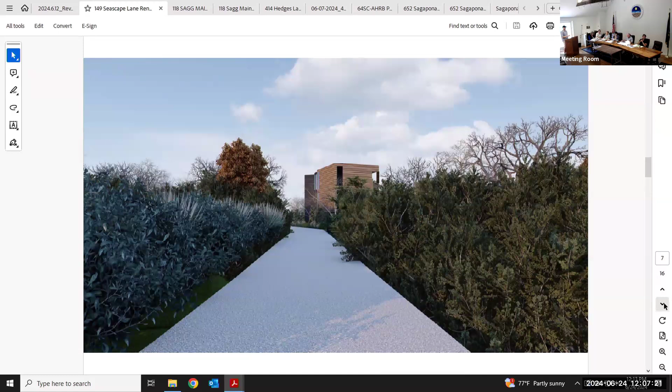So, some of the other comments were that our first renditions of the design did not have a lot of elements that matched the front to the back. We had a cantilever in the front, and then the back had a balcony across the whole back. So we took those comments and brought it to show similar elements throughout, which I feel we grabbed in this design.

I don't know if you want to go to the daytime. So the front has the black material screening in front of the windows with the natural wood tone. We're going to follow that to the back elevation with similar screening material, so those elements are kind of matching front to back.

That design - in reviewing some of the other modern houses, I know some of the board members mentioned to take a look at some of the modern elements in those houses. So I took a look at those. I do have images of that with me if you need to see some of those elements.

So last hearing we also had a question, or every single meeting we brought up building height - how tall is this house? And the house is 31 and a half feet tall, which I confirmed with the building department here, with John, that it's the same height as the other houses next to it, behind it at 131, 139, and 138 Seascape. They're all the same height. That's the maximum height that we're allowed in this zoning district.

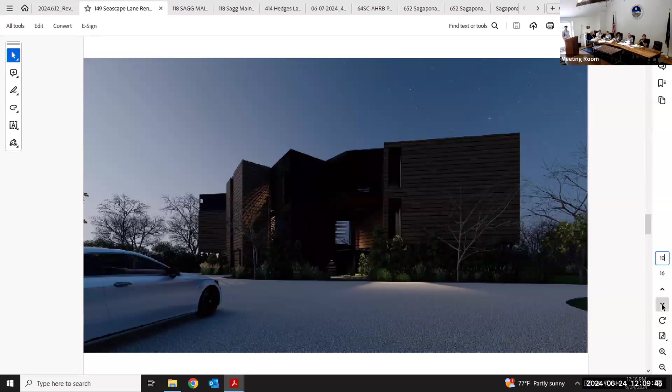That's it. So, last page that we have.

And it's all glass across. I want to point out that our side elevation that's pointing that way only has 24-inch high glass pointing that way. Not a lot of light going across Sagg Main.

We also discussed window treatments that you were favorable for. So we're going to do on the second floor the Huper Optik Ceramic 30 film, which only emits 30% of the light from the house outside. And the first floor is going to be the 40% light emission coming out. So we're going to be looking at that adjustment that we came to agreement with.

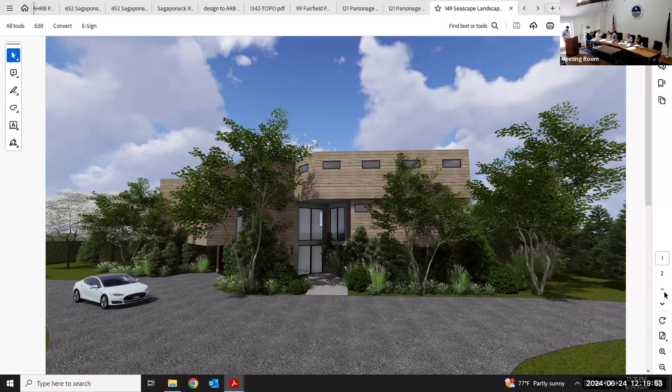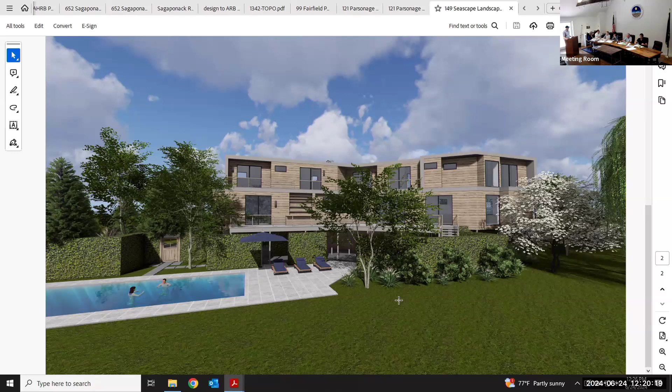We've also discussed possibly doing a berm in the front of the house. From my understanding of code, my thinking is that we can't grade up, but I don't know if we could discuss that.

I think with the front landscaping, hiding some of the elevation with the landscaping you have takes care of the visual aspect without having to put a berm there. Does that eliminate a lot of that mass and scale issue? Yeah, from the front, I think it really does.

Okay, it's just really, it's from here, and I know there's a measurable precedent. I just wonder if this exposure we see from here would necessarily suit a prospective buyer to have that exposure as well. And if it's landscaping, I'm not sure how you ensure someone doesn't mow it down the second they buy it, you know?

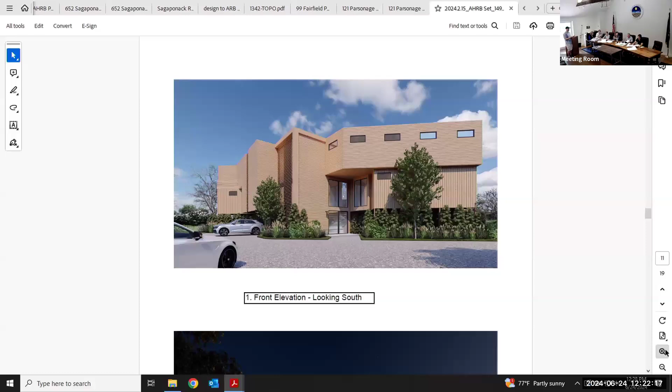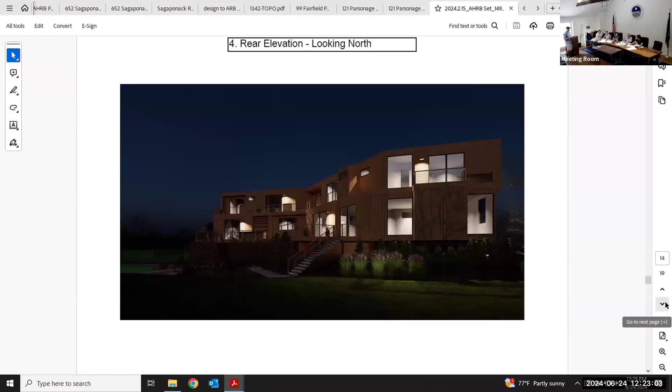I think the improvements are measurable. I don't think this is a case of them putting us up against the ropes time after time. I think the first changes were definitely subtle. I'll put the first few meetings definitely on you guys. I think it was more just like the materials we changed at first.

Yeah, we completely came back two months later. We made a lot of changes, tried to bring some elements from the front to the back, obviously still trying to maintain those views that my client really wants.

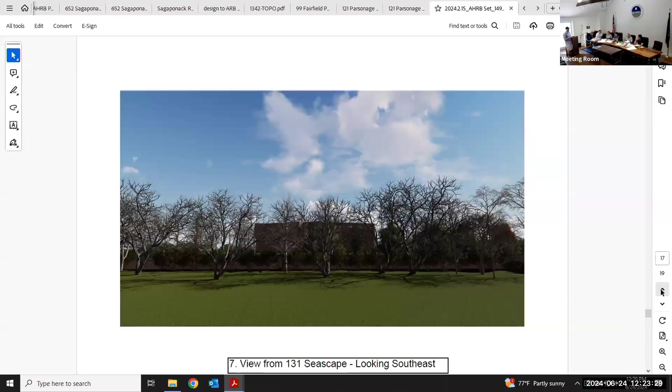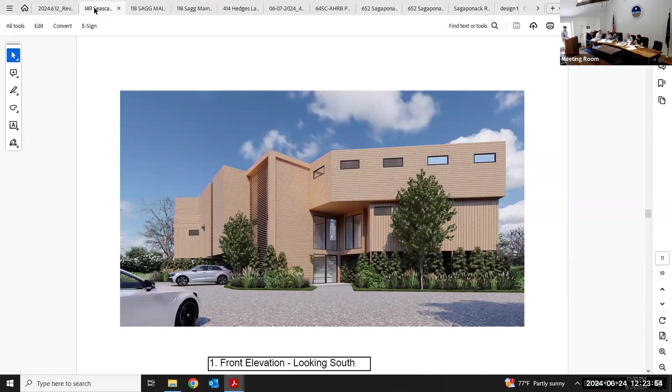The dual tonal color helps. I sort of think it does. I think it will from a distance. I think it could, I think it has in these renderings. And I think even if it does look like two houses, or somewhat, at least it implies a little break in the sprawl.

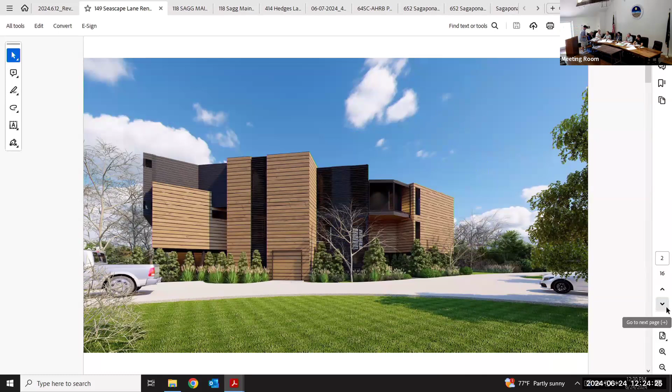Could you just explain the difference between the last time and this time? It looks more industrial. So, this was all open, now this is all enclosed. We created a lot of these elements out of certain portions of the house that we previously had. We had this kind of protrusion coming out... I don't remember which one we're talking about, the elements that came in and out.

Oh, yeah, so we took that comment and brought it so that it made sense, that everything has an idea behind it, a reason why it's there. Instead of just, this was essentially just a bathroom that had a window in it, a different size window that didn't really match anything, so we brought that to this.

I like the changes with this.

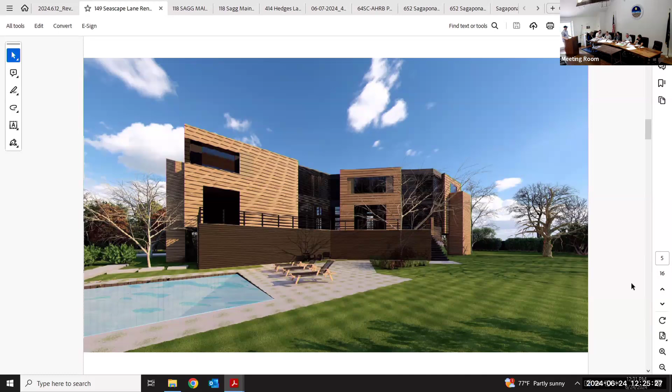I was just curious, being near the water, if there was any thought or if you'd contemplated any other materials to juxtapose with the wood, like stone or concrete or something, just from a durability and design standpoint. We did have some stucco in some of our first designs, but we felt that maybe that was not favorable, so we went more with the natural blues.

It's just a design decision. How are these going to weather, do you know? I'm just curious. I mean, is this going to end up being gray anyway? It'll tend to gray out, but I'm sure it's going to be like the images of the other houses.

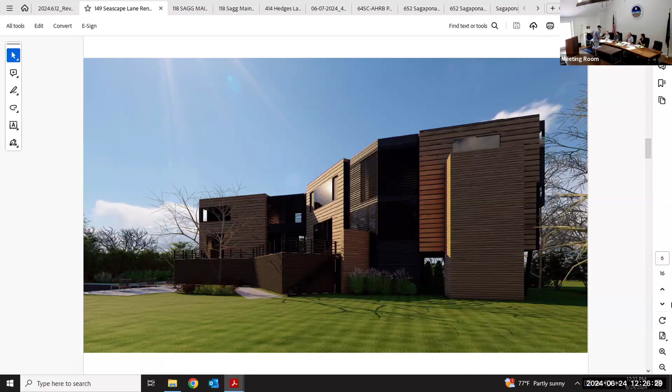So it's going to gray out. This is going to turn into a lighter gray, you said? No, that one will turn gray, oh okay, and this will just be... yeah, that should just be the same, slightly darker.

Is this stamped or painted? So that's slightly inked, how they apply to that material. It's a stain. That's a stain. It is a stain, okay, thank you.

The color of that stain, please. It's called Tiger Smooth. And that's the term used for how much it's burned. It's referring to a burn. It's burned Tiger Smooth.

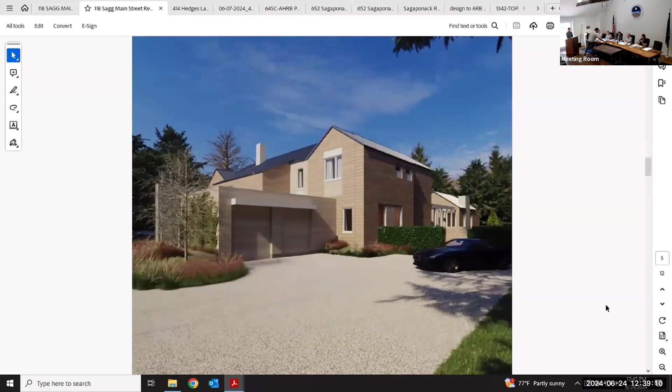I can show you some images I took today of the front from Sagg Main Street. There are three mature maple trees that are not on our property, they're part of the street space, so we are going to leave those. Inside our property, we also have a mature tree - I'm not a landscape architect so I don't know what it is, but it has a diameter of roughly 50 feet, so it's very wide.

That tree will be on the right side of the front. Going back to the back side, the roof line on this side was well received by the board, so we did not change it. But we reduced by a considerable amount the glass versus solid ratio on the back. On this side before we were at 57.44%, and right now we've reduced it to 32.65%. We eliminated all the transoms, reduced the height of the glass on both floors, reduced the width in the wings to the sides, and reduced the center part a little bit.

Also on the pool house, we reduced the size of the glass considerably. That's a view from the rear of the house, and if we move on we can see the side views of the renderings.

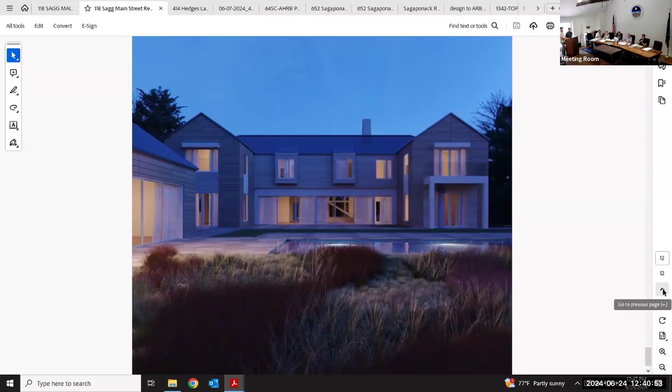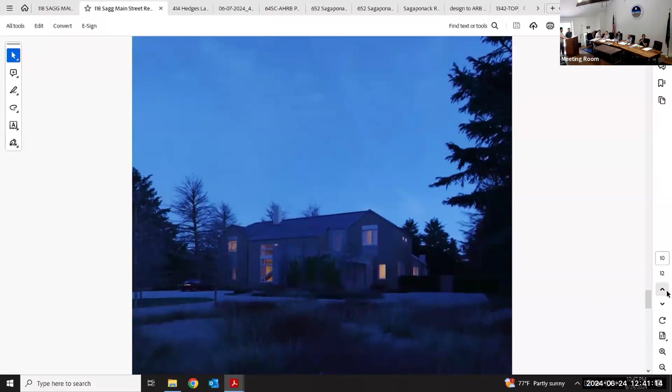That will be the right side, basically from the side where you access the garage - on that side we are at 5% glass. On the opposite side, the south facing left side of the house, we are at 9.73%.

These numbers for the last two sides incorporate the pool house - we're basically taking the pool house as part of the main house for our regulations. The height of the house and the roof lines and pitch of the gables are all under what's required. I believe they are 31 feet above existing ground level, and the flat roof over the garage is also under.

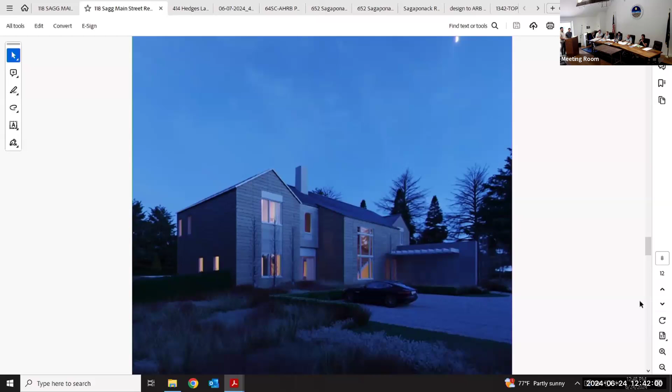Let me see what else has changed from before. Just to give some numbers, the proposed width of the house is 85 feet wide. The existing house we're proposing to demolish is 78 feet, so we've increased the width by 7 feet.

The house sits so the front of the garage from the property line is at 85 feet, and the main chunk of the house is at 110 feet from the property line. Adding the 25 feet of public right of way to the curb line, the main house will be sitting at 135 feet from the curb line of Sagg Main Street.

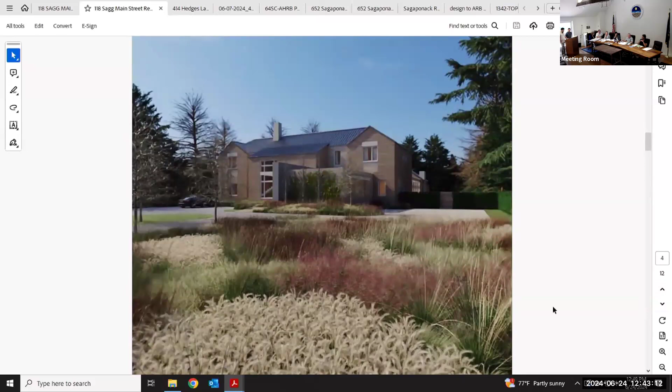I also did some comparisons to the properties across - the three properties right across from us: one is at 120 feet from the curb, another at 156, and another at 60 feet. On the north side of the property we have the farm, and on the south side we have a house you don't see from the street because of the landscaping, but it sits at 80 feet from the curb.

So I think that's a summary. That's been there a long time. Yeah.

Would you say that the zinc roof versus a cedar shake is an important design element? I have my client here, so...

We like the stainless steel roof. We don't think it's consistent with a more traditional style roof, so we'd like to keep this the stainless steel. We're open to... it's also just worth noting that the house right across on the right has a standing seam metal roof. Yeah.

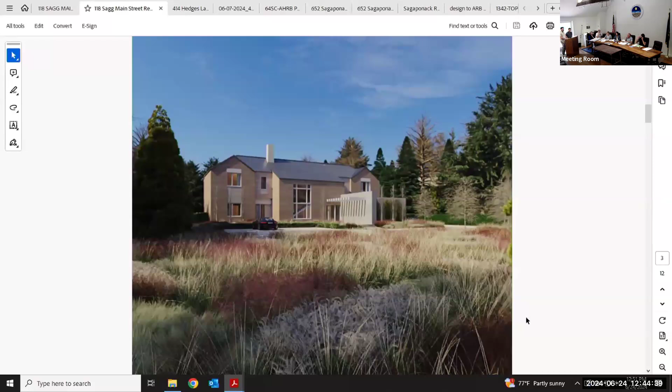Just a little detail, but on the front of the house, which you see on that rendering, the front wall of the garage, which has a flat roof and is what you'll see when you're driving into the property, we want to cover that whole wall with English ivy. So in reality it would look like a green wall.

And the only thing you'll see when you're walking into the house is also a vertical rectangular wall. The idea is that it would look almost like a freestanding wall. But from the street, you don't see it at that angle, it'll be screened by landscape. You'd only see it as you're approaching the house, and that wall will have a cantilevered pergola just to cast some shade as you're walking in.

And the flat roof on the garage, is that being used for anything like decking? No, we're not proposing any decking over there.

Also, the whole front, wherever there are no trees, so basically what would normally be a lawn, we'd like to make it feel almost like a meadow - very wild with tall grasses mixed with some wildflowers. So you wouldn't really see that much from the street, but as you're driving into the property you'd feel like you're driving through a more wild landscape.

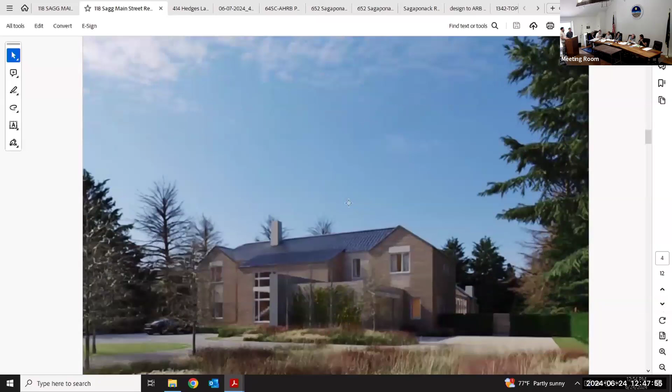The reason for the other two is those are like window seats, in the bedrooms - basically you have the window with a little cushion that you can sit on. The one that doesn't have it is a bathroom.

Same side - you have some shed roofs over those two back portions that come out on the side. What is that material for? The second floor, it's all standing seam.

Right, but the little shelter - the overhangs. It's just a little overhang so that if you leave the windows open, rain doesn't get in. It's an 18 inch overhang, so it'll just be a flat top with the wood in the front, painted.

Is it wood? What's the material - they will be clad in wood, yeah, but stained, those parts will be stained white. Oh, it's what you're saying, it's wood but it's painted white. Yeah, those portions will be white - the two overhangs and also the structure of the balcony on the right side.

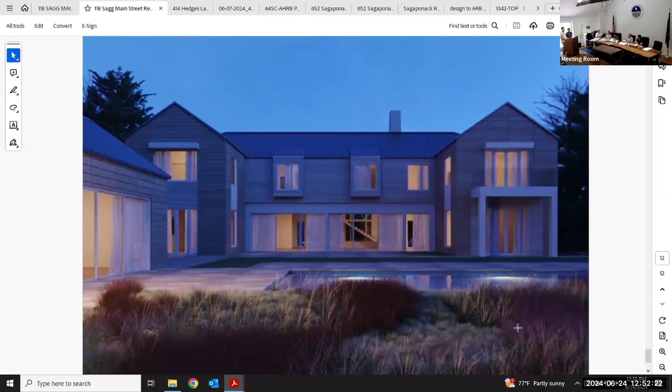Okay, sure, well that's not a question I thought would come. We're held to the public's understanding of what is important to the historical understanding and appreciation for the village. As one of the early settlers here, that's something dear to my heart. So I don't know, we have not, of course we have nothing but respect for it. Pardon me, because I don't know that particular zone.

Okay, all right. So if I can jump in, can everyone hear me all right? Yeah, if I can jump in.

I think we discussed this at the last, if not second-to-last meeting, regarding that proposed stone house. So nothing in our code- and actually, an outside question, is this property within the historic district, or is it the one slightly outside of it? It is one property away from the district, yes. So it is not in the historic district. It is right next door to the historic district, yes. But there is nothing in the code which obligates an applicant next door to the historic district, or to a historic structure, to comport with the historicity of those neighboring structures.

That being said, the code allows you to look at striking dissimilarity with neighboring structures, but the Secretary of the Interior guidelines are applicable within the district. So just a point of clarification: if you want to talk about striking dissimilarity with the neighboring historic structure, that's one thing we could do. Also, this is on Sagg Main Street, and I believe there is a view shed, like a scenic view shed, along Sagg Main Street. It's next door to that, yes. So obviously we need to respect the scenic view shed and the dissimilarity-versus-monotony dynamic in the code, but there's nothing in the code that railroads the applicant just for being next door to a historic property.

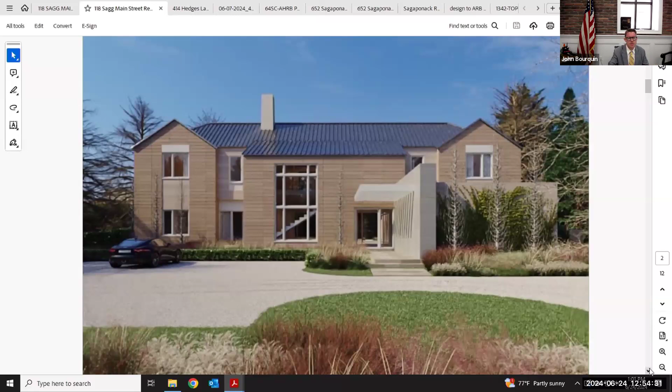If I may clarify, if I'm not mistaken, I believe we're two tax lots. Well, the Norton House - or sorry, the Wilford House - is your neighbor to the south. There's not another lot in there. Again, I might be wrong, apologies. I think that's just outside the historic district also. The Norton House is on the register - I mean, sorry, the Wilford House - that was contributing, as far as I know.

From what I'm looking at in the area, the house right next door - I don't know the name of it - it's a very large property with a swimming pool, so I can't see it from the street. It's completely blocked from the street by landscaping. It used to be visible from the street, but the most recent owner has put in a lot more landscaping. That was a very old house, and one of the founding families was there also.

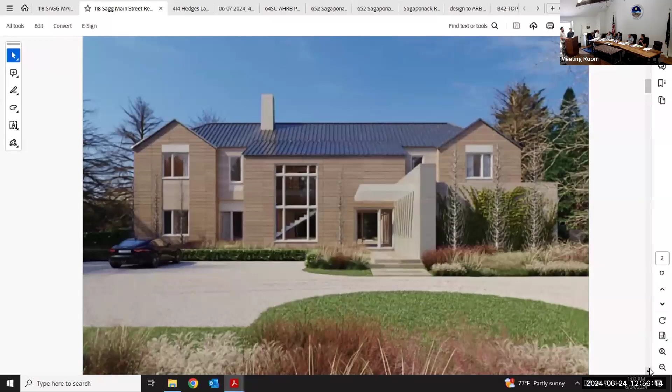I guess to try to answer your question - before, we had a gable roof house that had more of a contemporary barn look, so while the materiality of the house is not changing, we're proposing a house using shingled roof and siding, we've changed the shapes and overall massing of the house to be more in line with traditional elements. While this isn't a house that would seem appropriate in a historic district, it's certainly in line with the properties right across the street - I'd say two of the three directly in front have contemporary elements to them. So we may be more sensitive to what's across the street than what's in the historic district.

Those were changed and updated much more recently. There were a couple of short single-story ones - I imagine they're newer, yeah. 138 has been there all of my life, most of my father's life.

Does the board wish to say anything else on this? In tying it to what John mentioned with the visual of the open space, it might be helpful to have a rendering approaching the property with a viewscape across the Pike Farm setting. That might help us get a better clarification of what this will look like from the public.

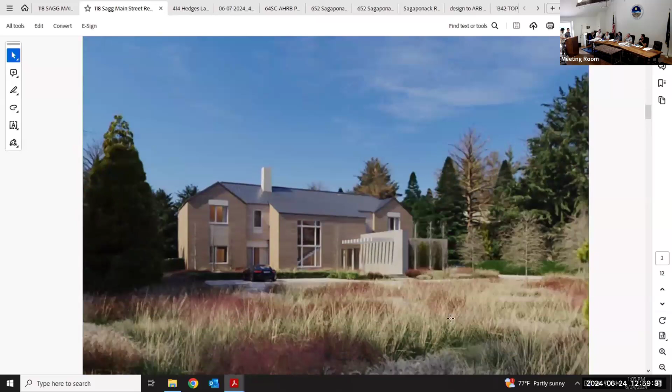Our sensitivity to that was in our window coverage, the glass coverage, which we reduced from 17.5% to 9.7%. And aren't you built below the maximum height you're allowed? We are a foot below the maximum height. That's in the two-story; the other one-story portion, of course, doesn't apply.

Also, the main volume of the house — if I separate the FAR out, 70 to 71% of the square footage we're proposing is in this middle part of the house, and then 29% is in the extension, the two wings on the rear, backyard side of the house, plus the stairwell volume in front.

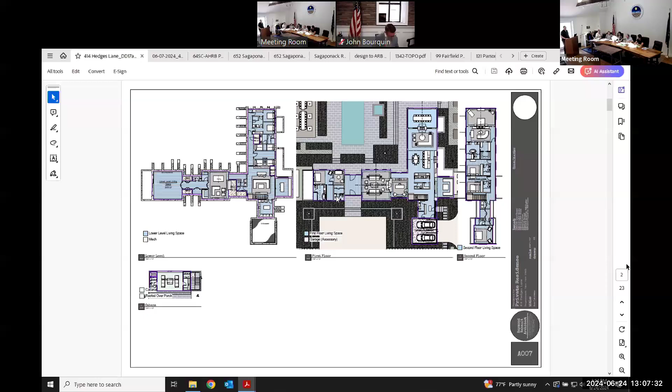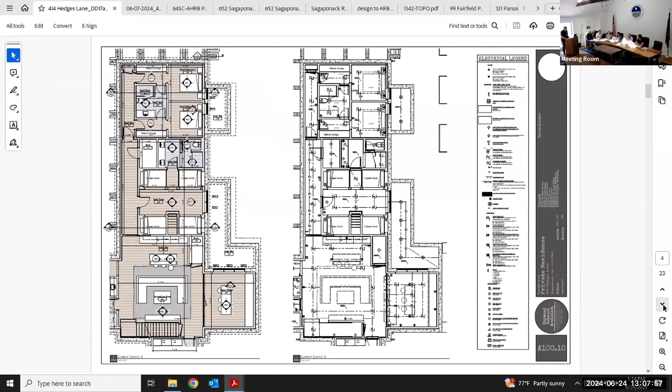There were some questions about the percentages of glass, and I'll look to reduce the overall percentage into the 20s. We've actually accomplished that. We have added a series of louvers on the outside of the glass that will reduce the glass by 50% on some of those elevations.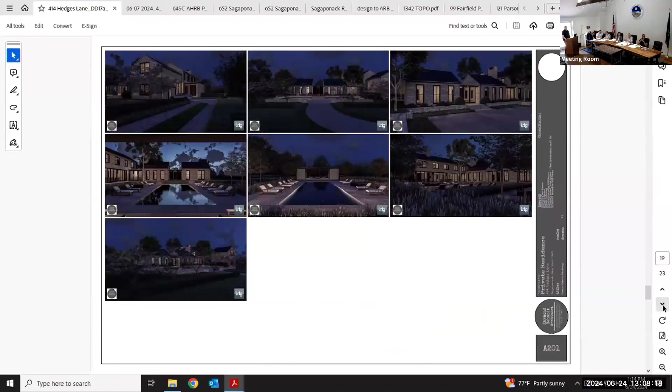So if we were to flip to A204, we've bubbled the areas that have been revised, both on the front and also on the rear elevation, the south and north elevations. We had some percentages previously on the north elevation of 34.4%, we're now down to 29, and that's without considering the special glass that we would like to use.

We have a glass that we used previously on other projects, which I have a sample here for you to look at. This is a low E3 glass, which has a visible light transmission called low E366, and it actually reduces the visible light by 66%, which is helpful to the client for heating costs and solar heating.

Also, it essentially doesn't allow the visible light out of the house as much at all. There's spec sheets that I have for everybody as well. You can see this, it's a little sharper on the edges, but there's a film on the inside of the glass that achieves that visible light transmission.

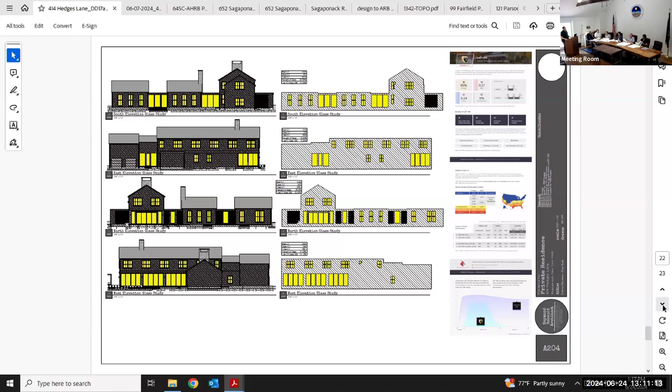They have a helpful chart on that spec sheet that shows where our visible light spectrum is, and then there's different types of light, like infrared light, which could really cause damage to furnishings and things like that. So this is a beneficial product to use, and if we take that into our calculations, it reduces things even further.

So on our south elevation, we have 24%, previously we had 27%. With the low E3 glass, that brings it down to about 16.26%.

On the east elevation, we were at 16.6, we've retained that 16.6, and with the low E glass we would be down to 10.95. Then for the north elevation, the one that was at 34% last time, we're down to 29, and with the low E glass that would bring it down to 19.4.

So it really does make a big difference. Then finally, for the west elevation, we're at 21.4%, and with that low E3 glass, it would bring it down to 14%.

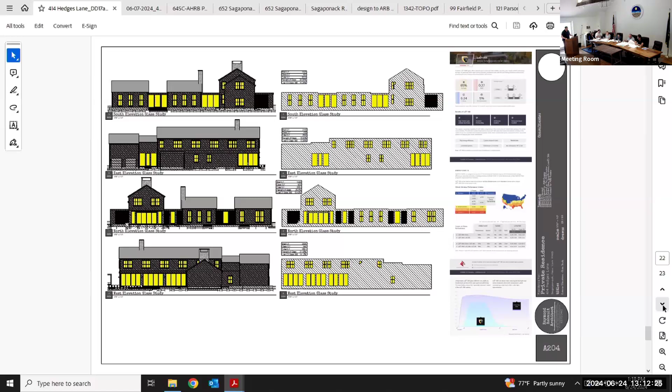We've also updated the renderings on A201. You can see the louvers. Can we zoom in on the windows? So you see them towards the back elevation, kind of that pool elevation.

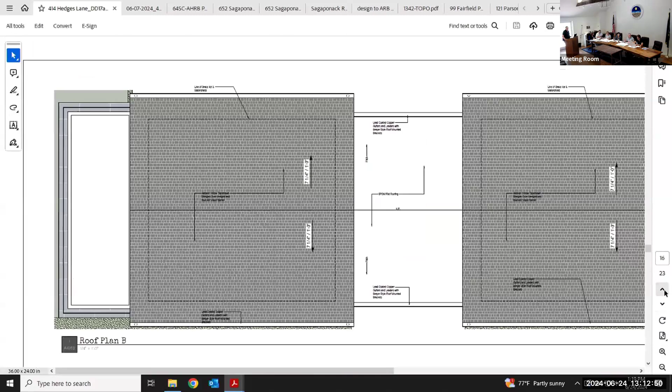We've also updated the renderings in the LaGuardia presentation. Those are full page, easier to see locations where we're putting louvers. It might be best for me to just point it out to you.

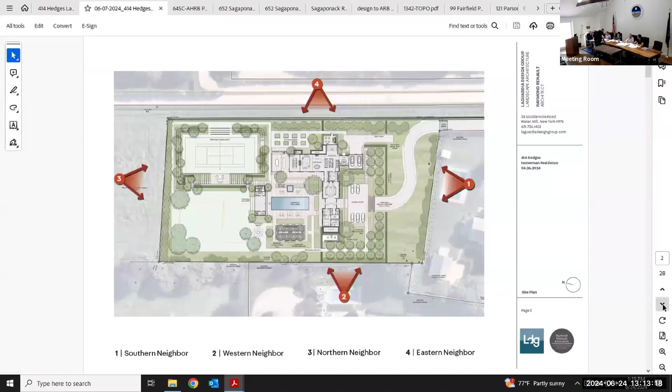In this elevation right here, we've got louvers here and here. This is an operable panel, but these are two fixed panels. And then here, same thing - this is an operable panel, we have two fixed panels here. So those are louvers, which really give the client some privacy going into the backyard as well.

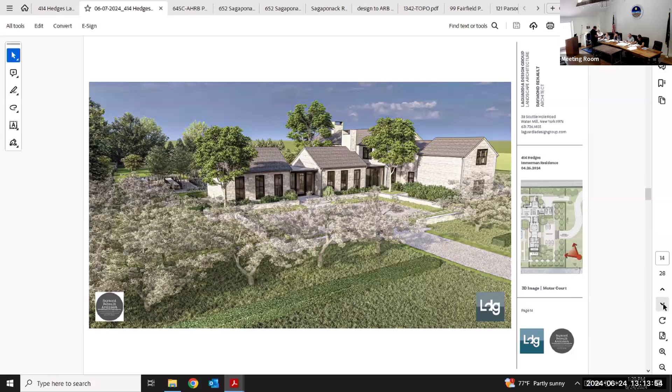And then also on this elevation, this is kind of the blow up of that. It's on A201, the LaGuardia presentation, page 15.

So on page 15, you'll notice we have glass panels here again, and now there's louvers covering the glass panels, and that happens on both sides. We added it to this elevation because when you're inside that room, we wanted your experience to be the same, and that helps to reduce our north elevation, which was really the only, let's say, offensive elevation.

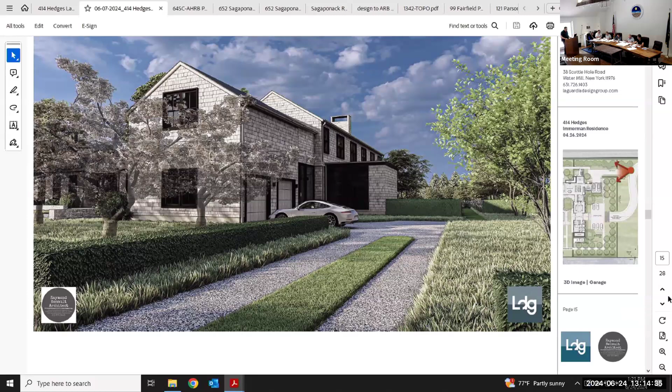With the amount of glass—on page 16, you can also see the louvers on the north elevation. They're on both of the connectors adjacent to the operable panels. The middle section is the door, with two fixed panels adjacent to that door.

What are the ceiling heights on the first floor? 10'6" on the first floor.

One of the things we've done with this design is create graduated elements toward a two-story volume, so the house isn't essentially two-story—it graduates up. There's an interesting play of elements that allows it to graduate that way. It's nice, restrained in some ways.

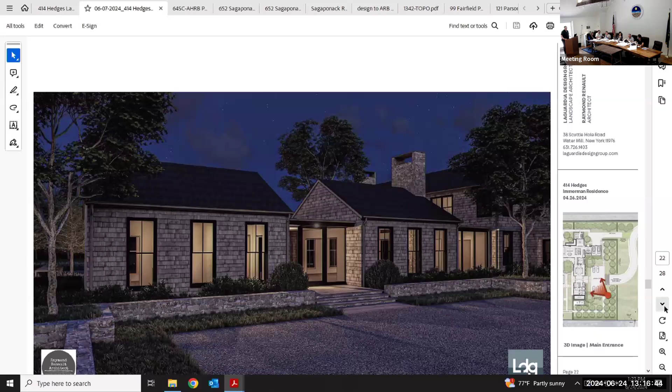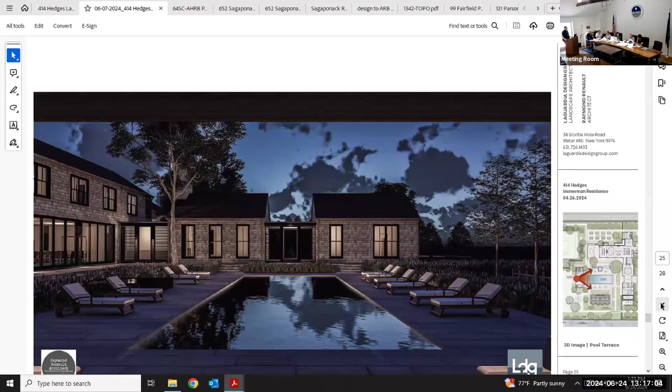That's fine for you. Understood.

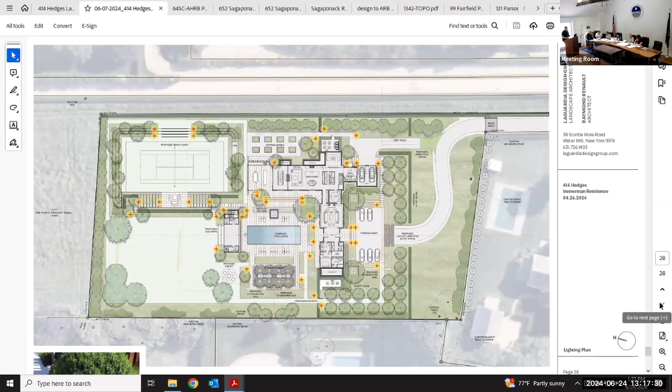Six, it's the same one here. There's 17. On page 17, the part—yes.

Is that a screen porch on the end, or is that just glass? It's a glass-enclosed dining room. It'll be fully heated and air conditioned, so it's living space.

The panels open up in the center and will have a screen, but it's primarily meant to be used as a screened porch that they can use all year round. The idea is it would be nice to have that as a screen porch all year, but there's the reality of snow and winter that everybody has to deal with, so we'll be using panels there.

That's just a very large expanse of windows. But other than that, it's a very nice design element.

Other than that, as you said, it's really restrained and effective at breaking up the volume. The other thing to point out is that area faces inward on the property—you're looking at a pool, and there's lots of landscaping that will buffer it so you won't see that from any perspective. We were very careful about placing our large pieces of glass so they're not visible from adjacent properties.

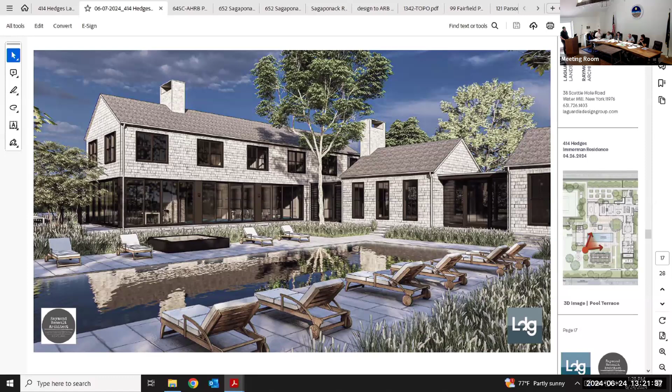Thank you very much. Thank you. Would you like to hold on to that glass one?

I have—no, but let's make sure we take that down. Yeah, I'm going to take this. We actually have the spec sheet. Okay, which is also incorporated into that submission.

Thank you so much. You're welcome. Beautiful home, thank you so much.

Like this, how about that? Can that be a requirement of the board? So are you keeping these? No, it'll only make me sad if I look at them. Yes, yeah.

Nope, thank you. Yeah.

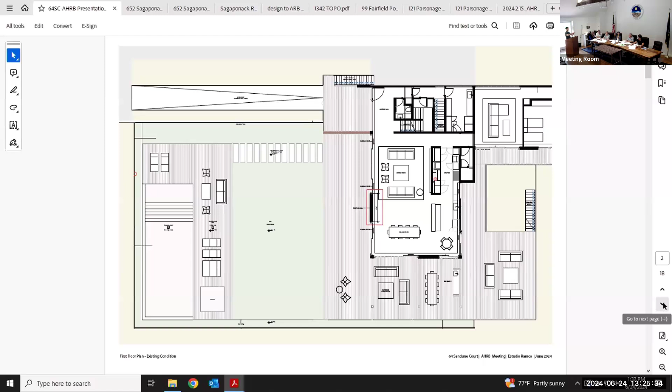If you slide to the next slide, that's a zoom of the current situation of the wall as it is. Next one, please - that's the south elevation, showing the wall we would like to replace.

And this would be the proposed solution, replacing the wall with a fixed unit and a sliding panel that would be completely blind, so we can move it and no light goes through it.

This is just a schematic drawing showing the percentage of glass between the original version and the proposed version. We're actually reducing the amount of glass slightly when the sliding panel is to the left, because we're keeping two columns between the windows that are technically not glass, so that adds up.

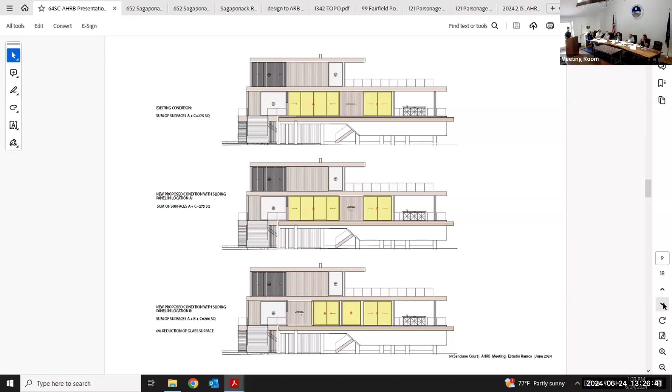We have some renderings as well showing the situation - that's the view from the pool. And that would be when you move the sliding panel to the left. Next.

Would there be a provision that this must stay in existence following any storms? That would be part of your resolution - right, some sort of covenant in writing.

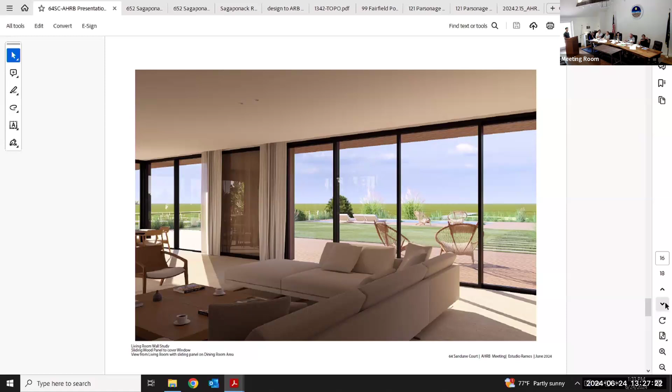I'd be particularly concerned that the inside of that wood panel, having moisture trapped in with no light, would get mildewed and blacken up, and therefore would always be slid as far away as possible. Would a fixed panel still give you, not the most expansive view, but some directed view that can sometimes be nice too?

That's a pretty valid point. I think air is still going to run through between the window and the panel, and considering it's a south wall with sun, it's going to be a pretty dry area. So we think it's not going to be a big problem. If it happens, this panel can be taken out, milled, sanded and put back in the same position, because it's sliding and there's a possibility to take it out.

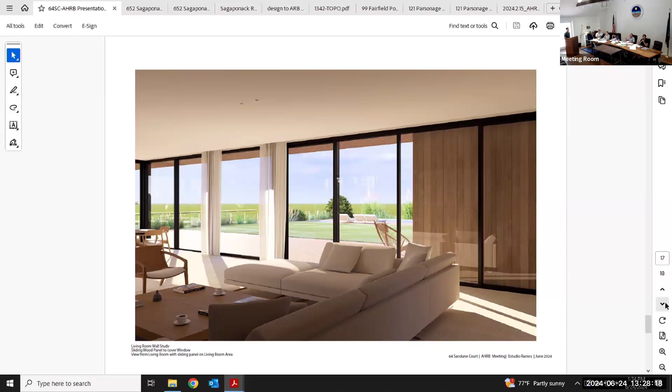So, what is the distance between the window and the panel? I would say between 4 and 6 inches. If you go to the floor plan, you'll be able to see that.

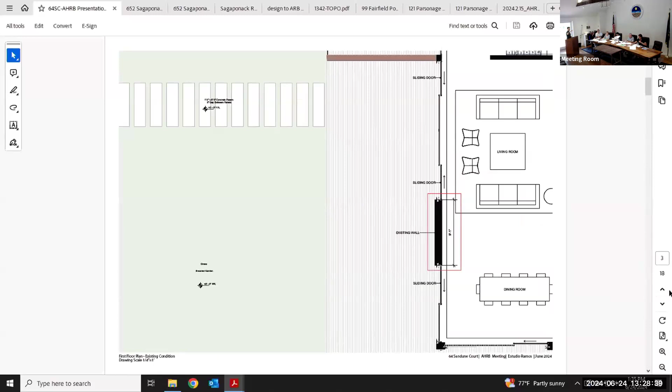Is it possible to zoom in on that floor plan, the one below, so they can see how close to the window it is? So to the columns we are tight, but to the window we have approximately 4 to 6 inches. But nothing can go in between - that's a fixed unit, so nobody can go out. We have the egress doors on the sides.

The good thing is that this is mostly for when you're inside the house. During the night, it's not that you're going to gain that much from the views when you do it. So that's a good reason to put it back in place in case the light is a problem.

Any further questions?

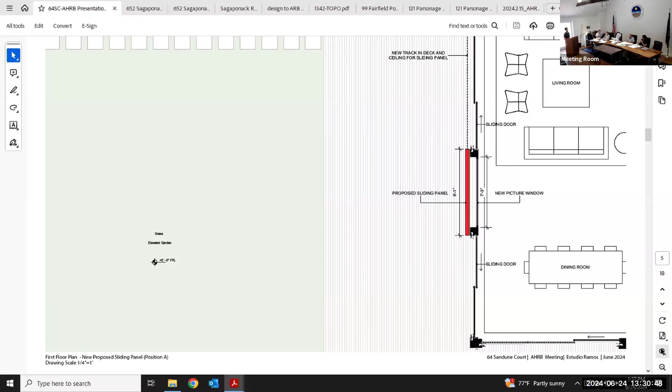Okay, great. Emily, any questions? No, no questions. Okay, is there a motion to approve this?

Sure. All those in favor? Who's the second? Sorry, second—who's the first? I guess she was the first. Yeah, I guess I was the first. Second, so who's on second? I don't know, we're getting there. I'll second. Okay, thank you. All those in favor? Aye. Yes and nay? I'm not, this is my first time seeing it since I wasn't at the meeting last month. This is the first time.

You can say no. I'm yes with the fixed, 100% yes with the fixed panel. That's not what they're asking. I guess... you don't have to. Yes, I'm going to hold off. Okay, so you'll be negative? Yeah. Okay, so it's approved 3 to 1.

Okay, very good, thank you. All right, thank you. You can—thank you.

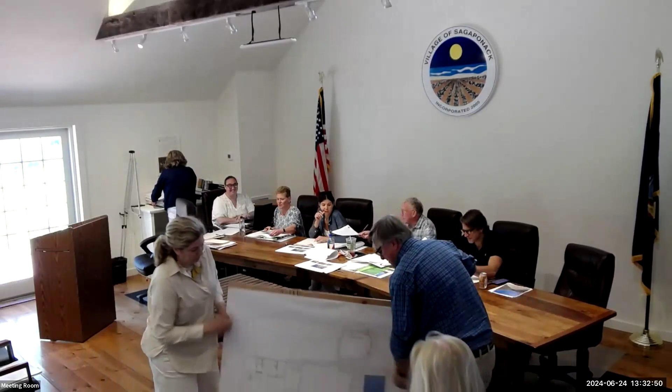Going a little old school here. You'll know why when you survive being older. No, you're sitting down. If you want, I'll bring them to you, if you want to hold a copy.

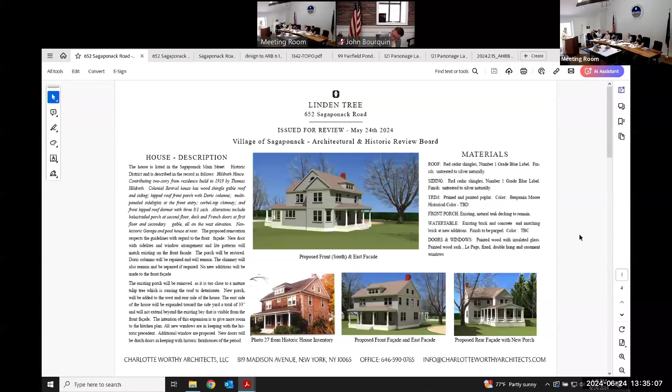So if we look at—just get it down, what's your name? I'm sorry, my name's Charlotte Worthy. All right, you're on file. Okay, yes. If we go to S 2.0 and look at the site plan, they're looking a lot different, more complete.

Maybe zooming in, I wanted to talk about the changes we're actually making to each individual structure here. On the site plan, we've shaded the areas where there would be additions to the footprint. We're well under the FAR here. But the main house has an existing porch—again, it's not historic, and it would never have survived given the slope of its roof. So we have reconfigured it.

And turned it 90 degrees, having it look out to the landscape. The garage, we're calling it garage barn, it's the structure at top. It was 2 cars facing the road, now it's 1 car that enters from the side, and we're transforming its look away from a suburban 2-car garage to what would be a small barn.

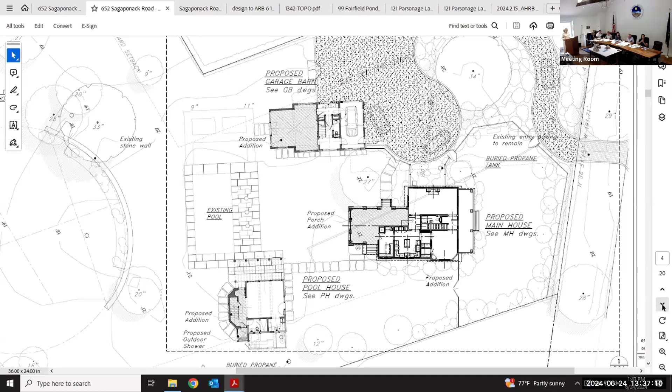And the pool house has a very treacherous interior stair at the moment. It serves as a cabana for the pool on the first floor, and it's intended to be an artist studio on the second floor, which, given what you've all spoken about today, we've got windows because it is an artist studio. Thinking more of the details of the main house, we go to 1.2.1... 2.0... first.

There is some restoration of the main house. We all love what the street facade looks like now, with the exception of a balcony that protrudes on the west elevation of the model. We're taking the balcony off, and removing the two French doors that were not original on that facade, putting windows back.

There's a balcony here, across here. This was doors with steps going out, so now it's back the way it was before, with windows. The porch is sagging a bit, so we'll lift that up and restore the Doric columns. It's all new windows and doors throughout, Le Page windows, 5/8, or 7/8 if we're forced to, Muntin with back to cottage windows - they're 1/1s now.

There are some, this and the side lights flanking the front door. If we can restore those and keep those original pieces, like the overly painted Doric columns that look like the original stuff, we'd take that same approach with those windows. Everything else would be new. If they can't be restored, they're new too.

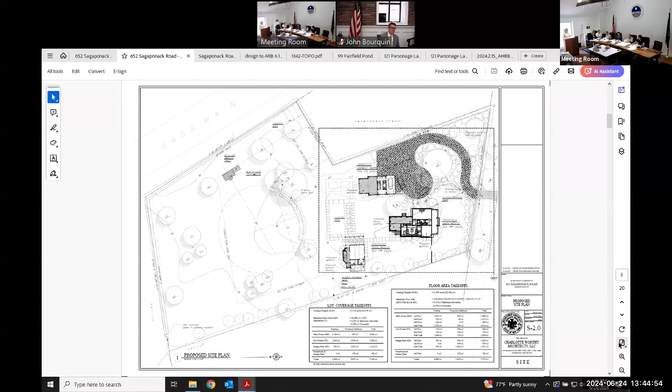The straight-on approach, just right from the street into the garage barn, was something that the owners did not like, full stop. So we got in a car and drove around that beautiful beech tree, and it does make a nice comfortable curve there. You can easily slip into that one-car garage bay, but also park around and get in and out easily. We've set up a fenced-in lawn, and we will heavily plant that front just to break the street noise that's pretty intense.

They'd like to use that front yard as a room, so it's got its own gates and fence. And the property now is fenced in for the pool in a very similar way. So we're keeping that as the pool fence, the perimeter being fenced in. We will put a new refreshed gate at the back.

We've tweaked our outdoor shower so that we're falling within the setback of the house.

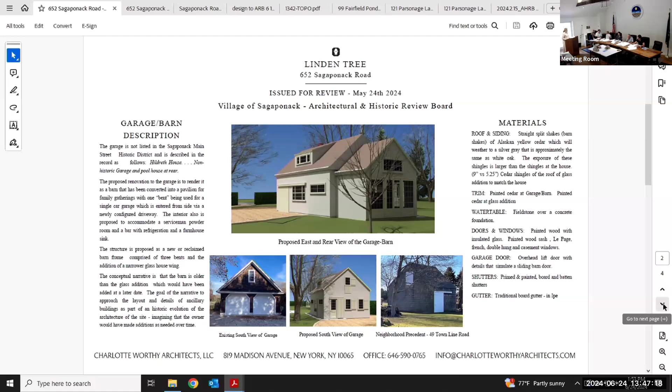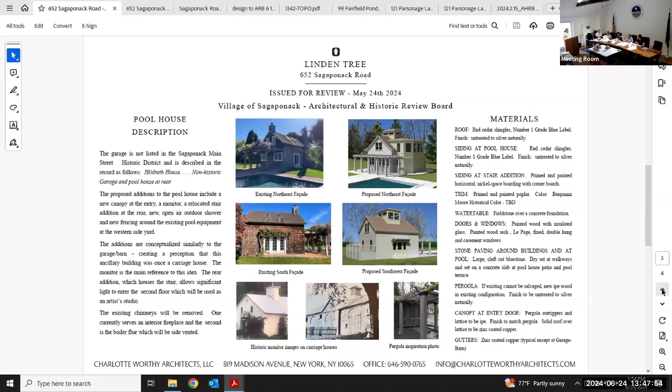In the pool house with the cupola, basically I'm just concerned about the lighthouse effect with the glass at the top. Is there stuff pointing up? That's the studio, is it not? It's an art studio, right. So is there lighting pointing up? I think so, okay.

Is that taken into consideration anywhere with the light calculation? Have you done nighttime renderings?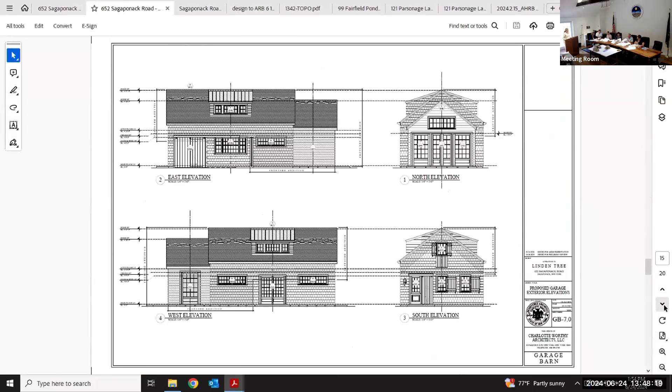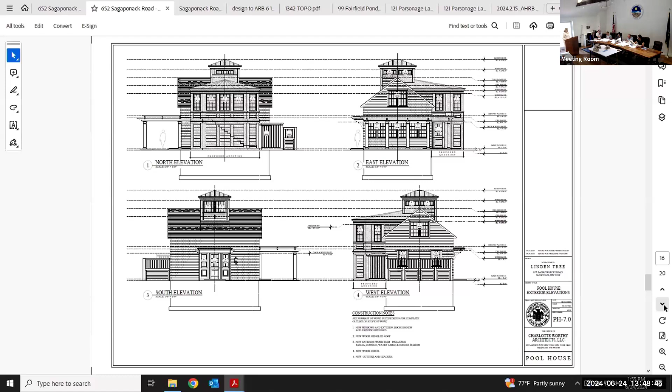Are there plans to do a glazing calculation? Oh, they're not. That's mostly replacing in kind on a site as large as this. It wouldn't be required, but if it is requested, it can be done. Are you requesting it? Just putting it out there that usually it's almost standard nowadays to get that.

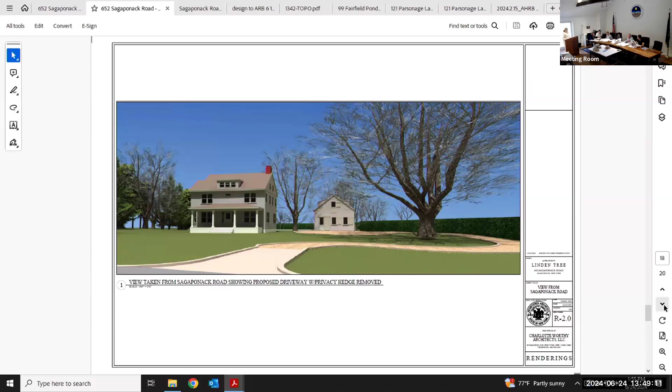If proof of interest, there could be some consideration as far as this is facing their own property or their neighbor's property, which is also relevant. But the larger windows are actually facing the street, where in the site plan that row of beech trees is located.

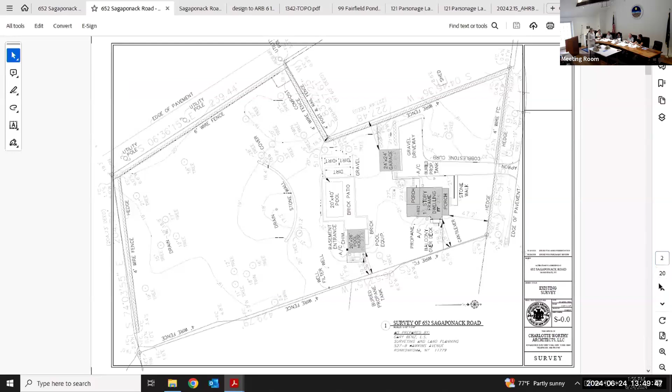The beech trees are throughout, around 620, and are a favorite tree.

I used to dog sit in the 70s there. What kind of dog? Oh, it was for the Jones sausage family, well fed. I can't say that—it was just an old dark dog, just a dog. It was about 77. Oh, there's a Labradoodle that is one of the children of the wealthy family.

Yes, so there'll be a dog in the house. My neighbor was frantically running around looking for my dog, so—an official hello, sorry, I'm not normally like that. Well, this is my one nippy moment I'll ever have in my life, and I can't think what's wrong with this, so.

It seems like you've been very considerate. Yes, I love doing this. To save a historic house, it's a privilege.

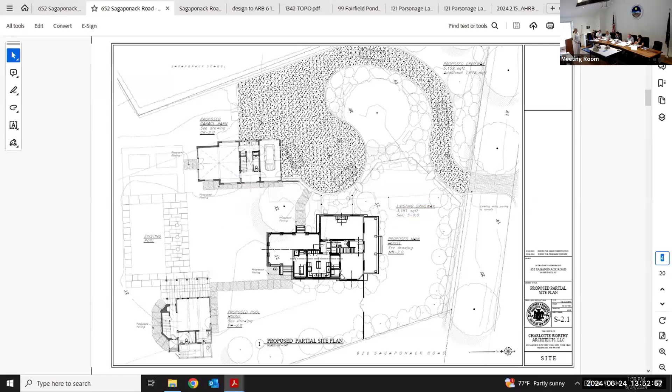That's good on the sides. Yeah, you and I clogged up a committee of two with the tree. No, I didn't. Okay, be thorough, that's okay. The only one on the board is who went to school there.

Yeah, it's a valuable asset to forward. Is there an interest in doing that? Does it help to be able to say that you did it? I'm happy to do that.

I know where it is. Yeah, I know where it is too. I'm putting it down as well. No, that's, I live right around the corner. Oh, it is, okay. Tony and I, stone's throw. Exactly, I've been around the corner since the mid-90s, so I know where it is.

I just think it might be nice to do, and then be able to say that you've done your homework. It's not really going to happen. I think for due diligence it makes sense. Yeah, I think it would be responsible of us to do it. So if we can, you're welcome, have permission to do that.

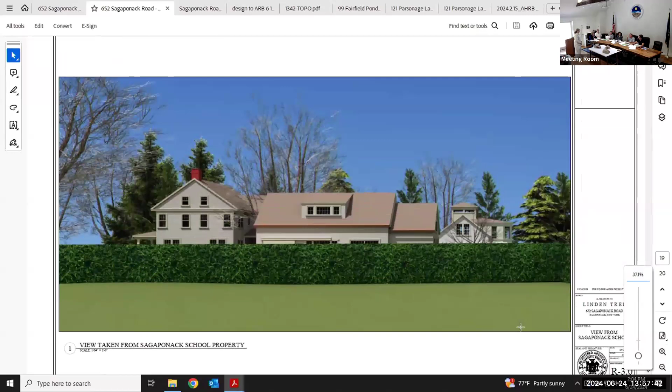Okay. Tony, you and Tom are gonna go. Emily doesn't need to go. I mean, and I'm going, Alicia, home, I'll look at it when I get out of the car. Yeah, that's my plan too. It's right there. All right, I can go and send you a note. Yeah, a lot of them.

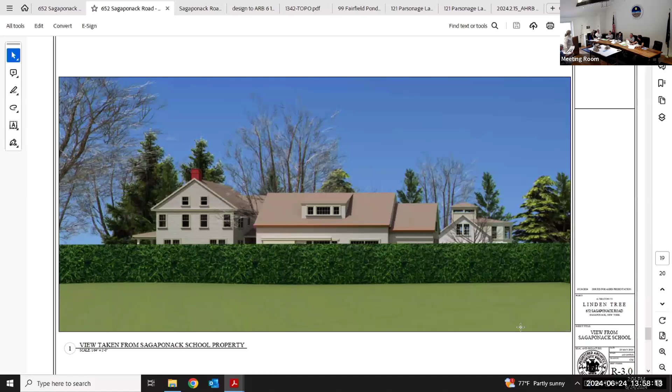Guys? Thank you, Charlotte.

Shall we pack our? Yeah, he's got this. Oh, all right, well, I'm gonna take you back. 99. Yeah, let me get. Yeah, that's it.

I'm just gonna keep this, I'm just gonna keep the linden tree. Dude, I like it, I really need it. Yes, I mean, wonderful presentation. The models were fantastic. Right. Love it. I have no models. And Charlotte has stuff. Yeah, I've been doing it since the last time.

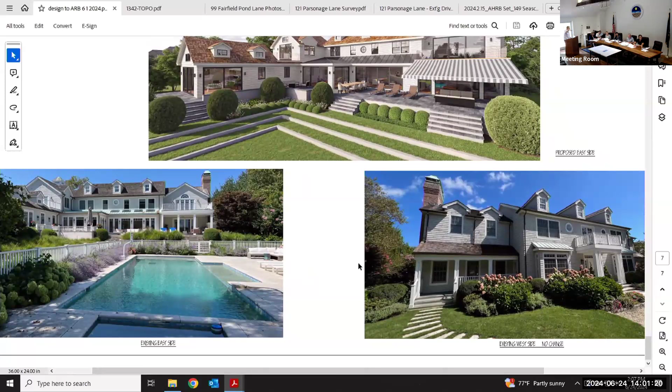And then if you go to the top of that picture, the one on the left is the northern facade, and the southern facade is on the right, which is...

...fairly close to the property line. There's a conservation easement to the north that separates the house from its neighbor on that side.

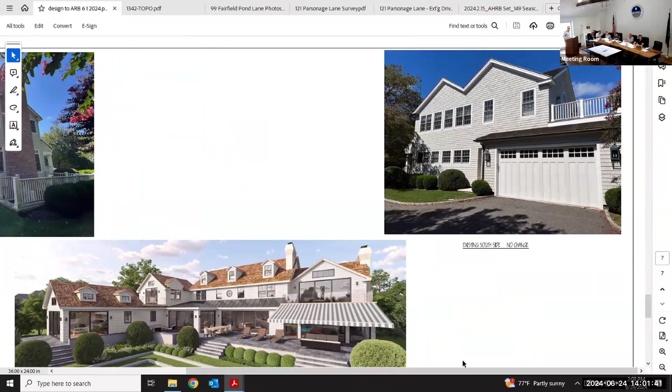And then in the middle, there's a rendering of what these alterations might look like at the end of the project. We have painted the house white.

What we're looking to do here is essentially this: we're creating a screened-in enclosure under an existing second floor deck, and we're looking to put some glass railings where there are now some simple balustrades on the second level.

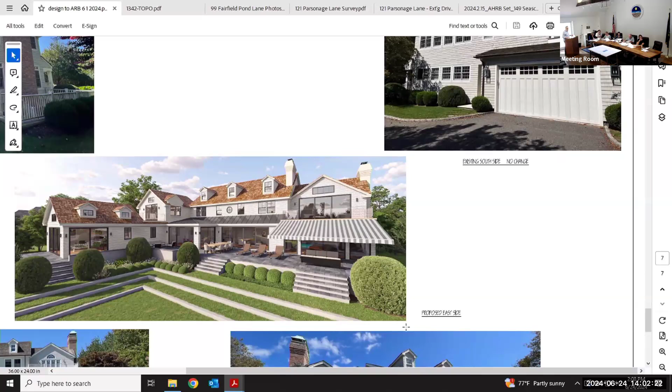And we're looking to replace some French doors that the homeowner feels are kind of dated - outswing French doors with sort of an arts and crafts look to them - with sliding glass doors.

So if we go then to the third page, let's just take a quick look at the elevations as they exist now and as we're proposing. I think it's pretty modest.

You can see the French doors that currently exist. There are a couple of eyebrow windows and some porthole windows that are also being kind of removed in this go round.

So those are the current elevations that are really being affected here. We're really only altering anything on the eastern and northern elevations.

So that's the current elevation. And if we look at the next page, this is what we're proposing.

We've expanded the glazing in the room that's on the right-hand side, under the screen porch essentially, but many of the other openings are being made smaller so that we can actually not expand the amount of glazing versus siding.

Could you toggle to the previous one for one second, quick? Sure. Okay, thanks. Right? Yes, you can see that.

Well, actually, it's a little difficult to see, because in the proposed rendering the screening sort of obscures the fact that the glass behind that is actually expanding a little bit. But on the glazing study you'll see exactly how that works.

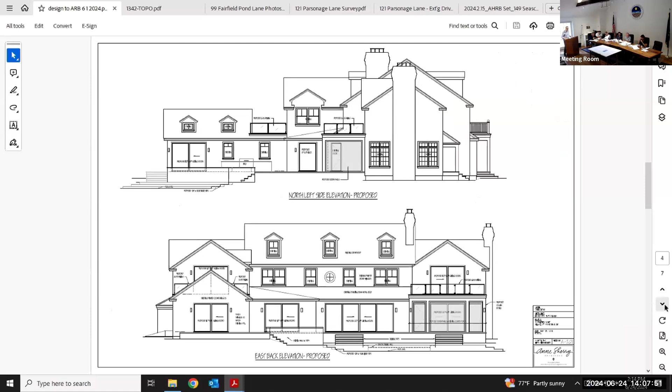The way this is calculated, 11%, I would have to review the numbers, but there's a lot of wall compared to the whole amount of windows that go in the house. I would say that top picture doesn't look exactly accurate.

Well, yeah, this is the thing, if I can walk over here. So we're actually looking at this angle, right? So this is this, right? But this side is here. Right, so we took this view to really capture the bulk of what we were talking about.

Are you including the roof in your calculations? I mean, the eyebrow windows, well, that whole wall of glass we're looking at. That's not on the bottom, because the bottom is a straight dog leg, so you're looking at that area there and then this part of the house.

Could you go back one to the eastern elevation? No, that's like a marquee. Yeah, this is what I think is sort of easier to see what we did here. We took this at this angle, right? So what you're looking at here, this, then this. It's just a little confusing trying to figure out what you're looking at.

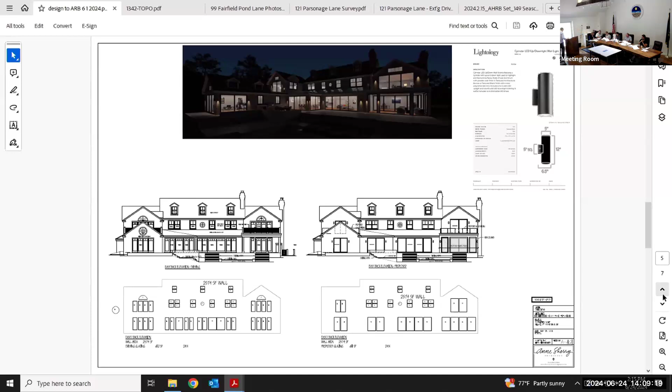The other thing I'm curious about is if you look at the proposal of your screened porch, and then you look at A403, proposed east side, you have that canopy, but it looks like you're saying a screened porch, but you're showing glass. It looks like that is all windows underneath there. Yeah, it is screened. The canopy kind of obscures that.

So this isn't accurate? Well, it is accurate. With the, you have three, and then you have this, so this is not what you're proposing. Correct? It is. So over here you have 2 panes, right here you have 3, and then you have 4 over here.

Well, that is the part that is confusing. Right, so the canopy perhaps obscures this a little bit, but the point here is that under that canopy is the screened porch. Well, now she's talking about above the canopy, so it's not just the canopy. To me it looks like that's glass, but on top of that, it goes back to the same rendering, which you're saying is not accurate. That's not accurate either.

I'm not sure I really fully understand what you're saying. What she's saying is that on this page, on A403, it's also the same thing that you said was incorrect here with the window and the windows.

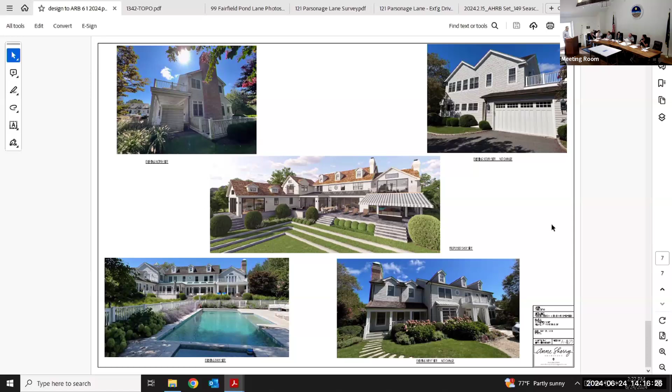Any other questions? Okay, very good, I know what I need to do. Thank you very much. Thank you. Open to adjourn?